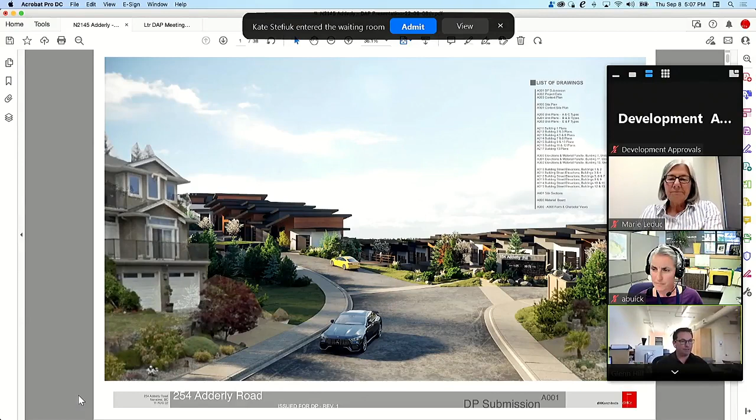As Christine mentioned, it's a 71 unit development at 254 Adderly Road. Everybody can see my screen, I take it? Yes, good. Okay, so just as an introduction, the image you see here is the gateway into the development at the end of Montclair.

Some of the project data, which you probably already know: we've got 71 units permitted. The proposed FAR is 0.45 within the R10 zone. This permits the 71 units based on 16 units per hectare. The permitted lot coverage is 40%. Our development proposes a lot coverage of 18.8% over the entire site.

I've just added one little note here: we took a takeoff of the area of the site that we could actually develop on. That excluded the 20-meter tree protection buffer along the parkway, which reduces the site area down to just over 23,000 square meters. That gives us a potential lot coverage of 36.39%. So even by eliminating all of the preserve and extra setbacks, we are still meeting our target of below 40% on lot coverage, just as a sidebar.

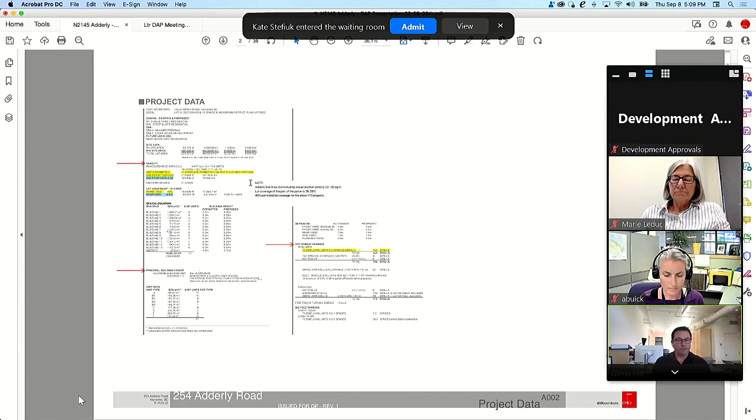We have a parking count of 174 stalls. That's based on some design criteria which we'll be able to better illustrate to you when we get into the site plan drawings. We have not requested any variances for height or property line setbacks.

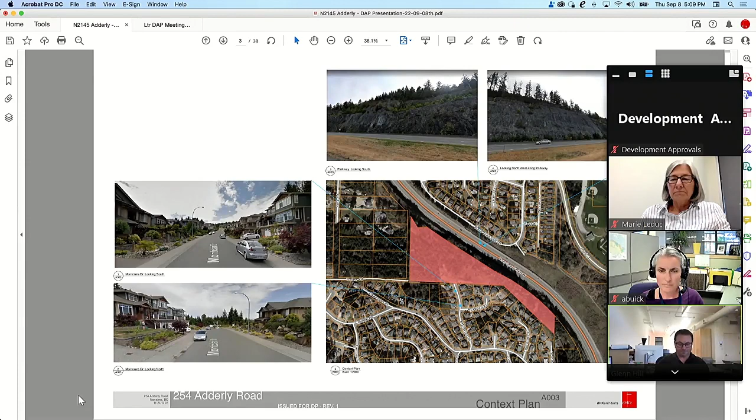Another little bit of context: this is the College Heights neighborhood, sort of the roads that flank off of Jingle Pot on the north. We've got the baseball diamonds, and just over to the east and south is Vancouver Island University and all of the associated sports fields, et cetera. This illustrates the zone within which we have condensed and isolated the development to the R10 zone.

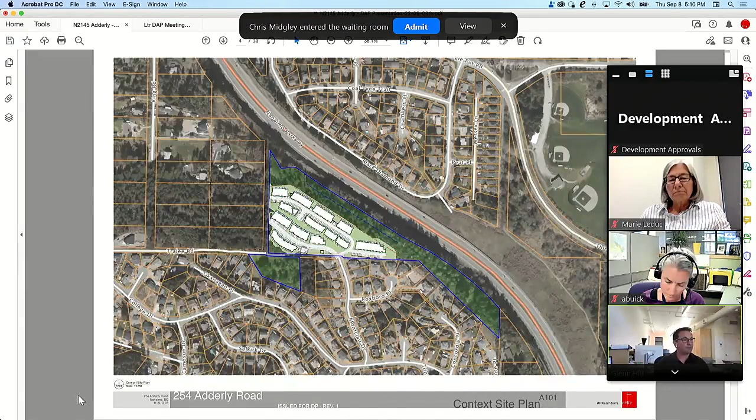This is a snapshot of what we're proposing. As Christine said, we've got a cluster of 13 buildings. The site design is oriented around a practical placement of two access driveways. Drew can talk a little bit more when it's his turn to chime in on essentially how the road was located in as practical a location as possible based on the existing grades, to minimize site disturbance.

The driveways along the uphill slopes are designed to bring the grade of the buildings on the uphill side up from the driveway a little bit, to create a bit of separation. These driveways are all potentially capable of receiving an additional parking space.

One of the big concerns we had was making sure that parking was going to be contained on site and not outflow onto Montclair and cause any additional congestion. Part of the rationale for our parking is to provide good proximity to two parking stalls for every unit, no matter where it is on the property, taking advantage of some of the longer driveways generated through the grading exercise. Those are additional spaces where parking could occur if there are additional family members with vehicles, or a bunch of visitors coming.

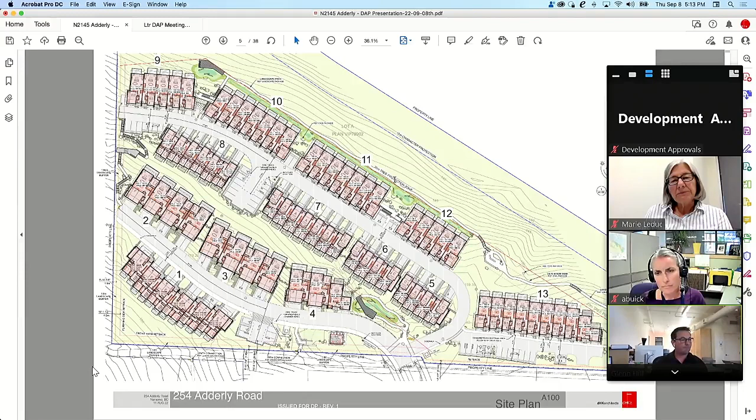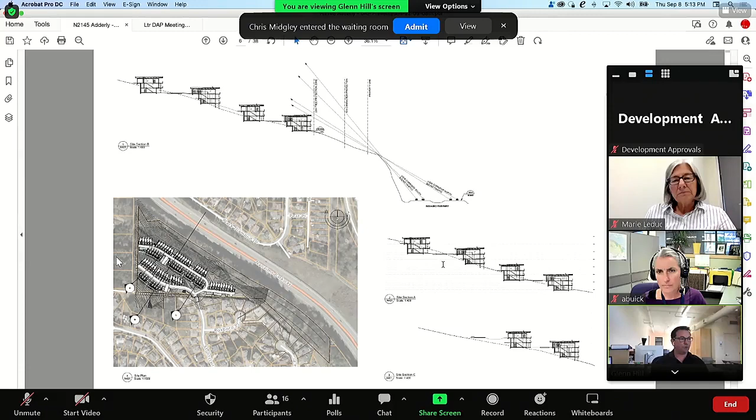These are some site sections to give you an understanding of how the units were designed to maintain nice views across roof lines—views to the north and to the east across the town.

A quick overview of our unit types: we've got an uphill slope unit type, uphill and downhill types, and then the larger units. I know you've seen these plans—we can refer back to them as part of the question and answers.

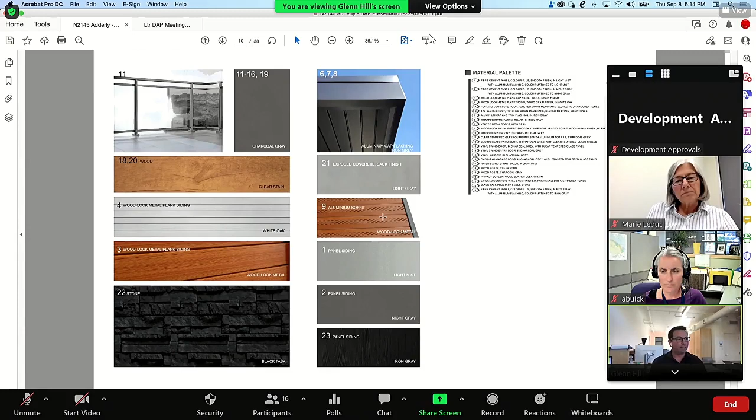Our materiality was largely driven by inspiration from the site—the forested nature of the site, the granite outcrops—and keeping within the design guidelines of working with muted tones and materials that reference back to the nature of the site. So we have a combination of muted gray tones for our flashings, wood-look metal which is highly durable, and then darker wood cladding and lighter gray cladding—a fairly soft palette of tones that reflect well with each other.

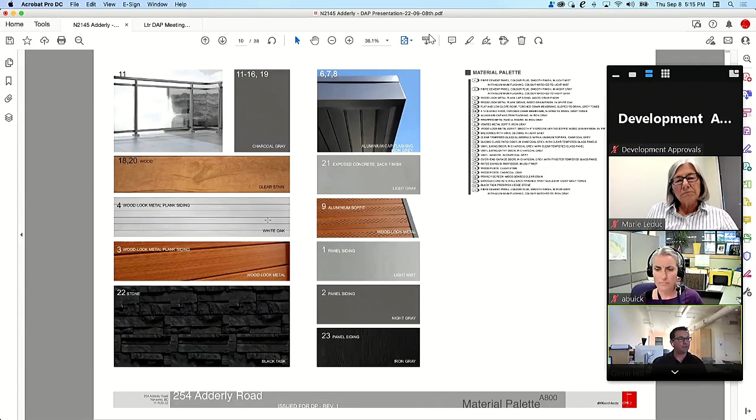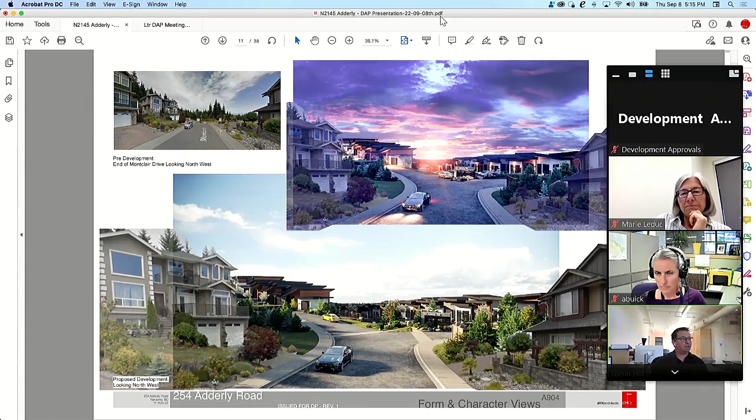Our building elevations illustrate how we have arrayed the tones of the woodland colors and the muted grays, and we've got balconies across the front. These balconies stretch out over the garage doors, hopefully detracting from them as a primary element, with the deck space and wood soffits underneath acting as our primary architectural elements.

The sloped roofs are a major part of our architectural design. We feel it works well with the stepping nature of the site—it gave us an opportunity to step and play with the undulating roof lines to create variation across all of the buildings.

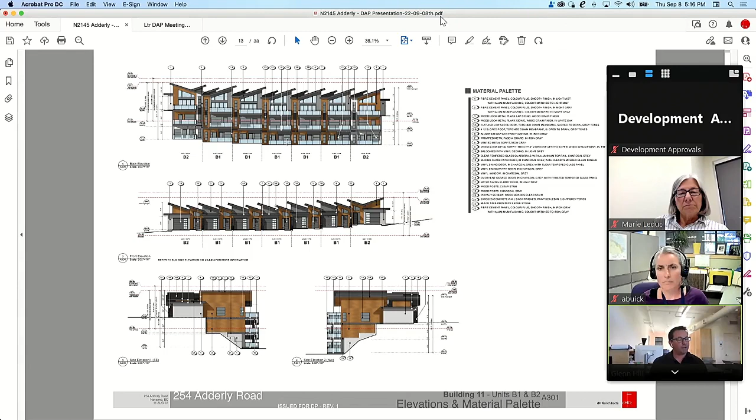Just some more illustrations of how the buildings are similar in character and adjust slightly based on the topography they're placed in. We have entry level units here, which cascade down the hill, and on the back side, this is the three-story nature of that same unit.

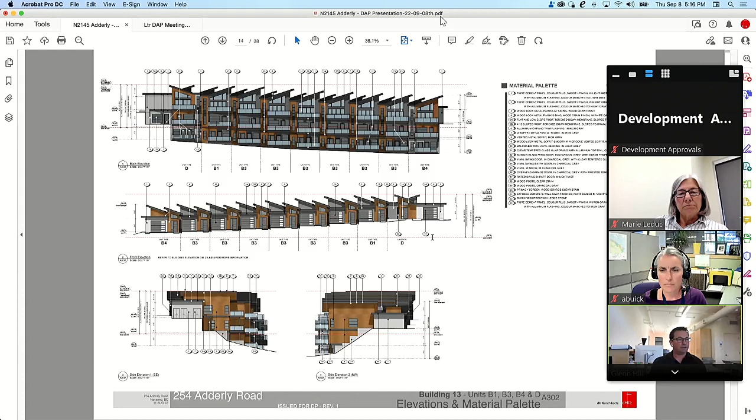Again, with building 13, it's a little bit of a unique one—it has a unique unit at the end and its own driveway. The rest of these elevations quickly illustrate that we've worked really hard to make sure we get the building design within the permitted building heights.

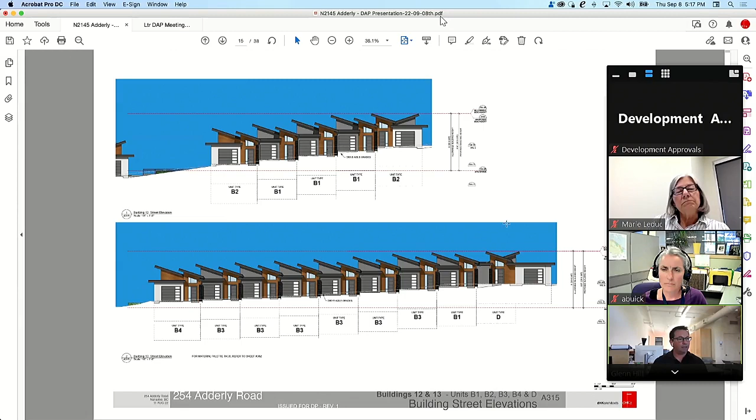You can see here the red line illustrating the maximum height, and then as we step and terrace, we actually peel away from that maximum height line. Each building had its own independent study done so that we could confirm we were working within the height while still maintaining the interesting form and character of the buildings.

Again, this is illustrating a similar concept, and then more of the buildings. There's a lot of buildings and a lot of elevations, so I'll go through quickly, and then if you have questions, we can answer them.

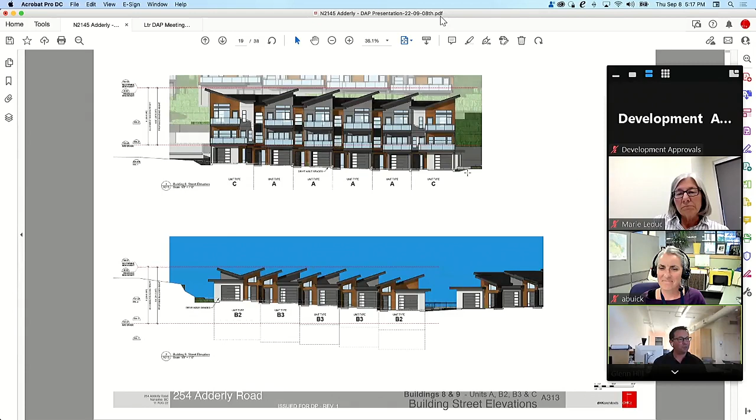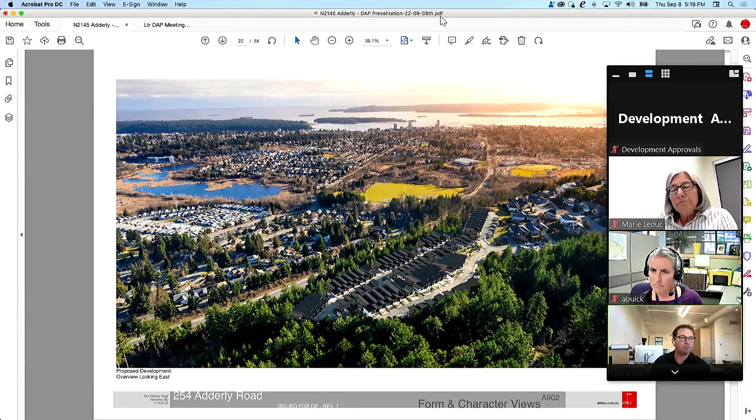This gives you an idea of the kind of overview of the city that is possible from the development.

Another illustration of the parkway and how, with the tree protection and character protection zone, the development nestles quite nicely in behind that natural buffer from the parkway, which was expected as part of the design guidelines within the parkway.

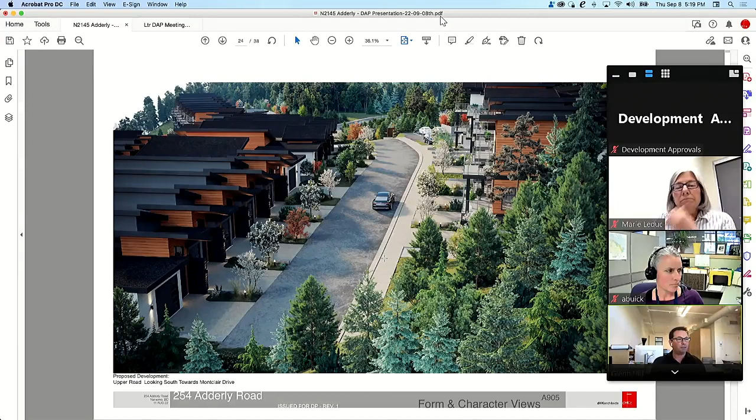Focusing in a little closer, part of our plan was to have a clean open street with planting separating people's driveways and entries, and some areas at grade level to sit and hang out, say hi to your neighbor, and then an extensive replanting of trees post construction, which Chris can talk more about. We wanted to give you the form and character of the street and neighborhood that we want to try and create.

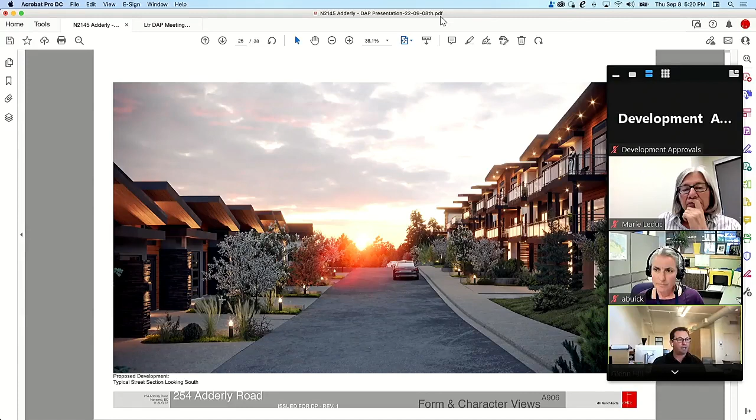You can see garages tucked away underneath these decks and open space amenities for the units, and then some patio grade level entry landscape and areas to sit and engage with the street.

This illustration is basically the majority of our buildings' form and character resting within this palette of materials, where wood tones are mixed with muted gray panel, and then we switch gears a little bit with our materiality so we break away from the monotony of multiple buildings with exactly the same material.

This is a shot of the lower road at the turnaround. This incorporates a little extra visitor parking notched into the hill. It's also where the fire truck turnaround has been designed so that vehicles can come down and appropriately turn around and leave. We're also anticipating a private garbage pickup.

All of our units have been designed with space within the garage for secure bicycle storage. The garages will all have EV charging capacity, and there will be space for long-term and secure storage for bicycles within each of the garages.

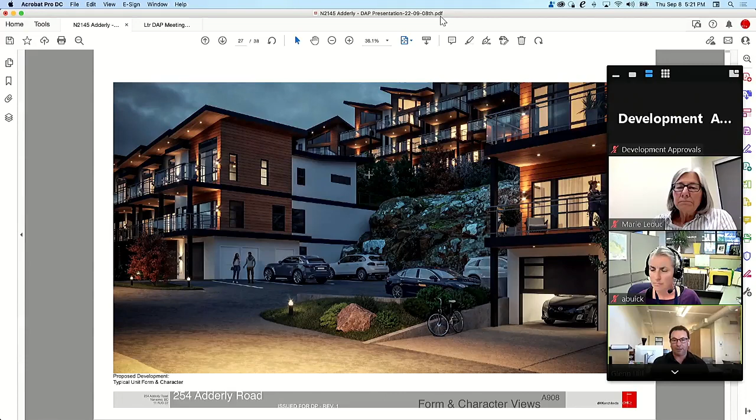You'll notice in the site plan we do have a garbage enclosure noted. We wanted to acknowledge a form and character for the garbage enclosure since we haven't confirmed the garbage service, with the hope that we could eliminate that with confirmation of a private pickup and driveway service, in which case we could convert that area into more amenity within the site.

So I will let Chris continue on with supporting landscape design. Chris?

Thanks, Glenn. Thank you, appreciate it. Hello everyone, thank you and good evening, and thank you for the opportunity to present this project.

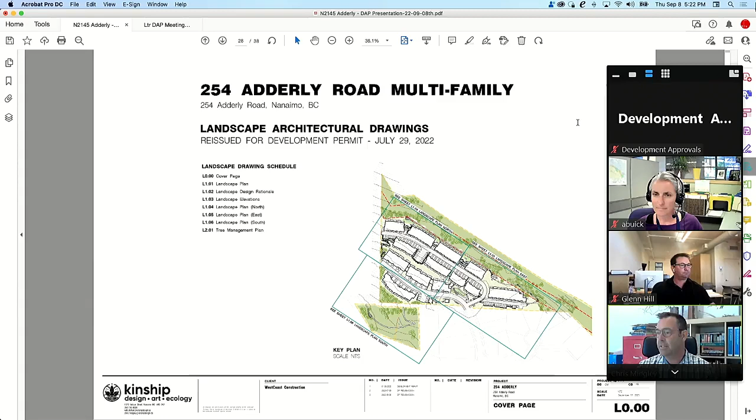My name is Chris Midgley. I work with Kate Stefuk at Kinship Design Art Ecology. I'm going to have to ask Glenn to be my navigator, if that's okay, Glenn. And so as this is the cover page, feel free to just advance to the next slide to show the landscape plan, I believe, I hope. There we go, thank you.

Okay, so just looking, I'll give a brief description of our approach to the landscape here, and then wander through the site at some of the key elements and features, and then touch on some of the more important or relevant points with respect to the development permit approval process and that sort of thing.

In terms of an inspiration or a rationale for the landscape, our approach was to take a very restorative approach and try to rebuild a reference ecosystem that reflects the Coastal Douglas fir ecosystem once development has largely been put into place on site.

So we're drawing inspiration from the dramatic natural landscape that you can see here, adjacent to the cliffside, and the edge condition that creates overlooking the city of Nanaimo.

While the site has already been largely cleared of standing trees and overtaken by invasive species in the understory, as a result of treating the site as a yard waste site for a number of years, there is evidence of an underlying historic plant community, with significant components of arbutus, big leaf maple, and Douglas fir, within a larger forest dominated by Douglas fir. This existing community reflects a sort of archetypal hillside rain shadow ecosystem that guides us as we go forward with the planting design.

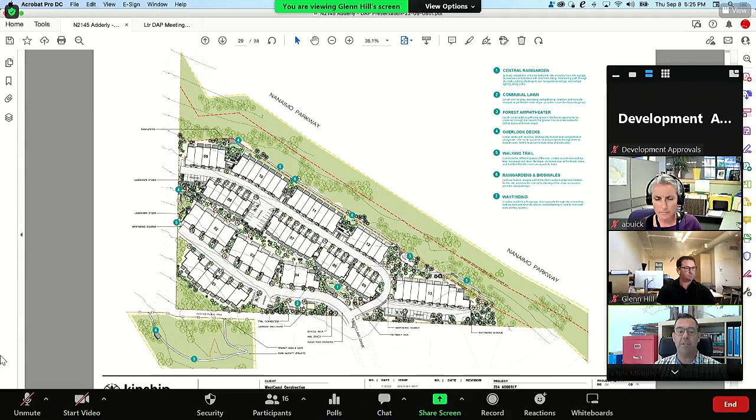Some of the key features of the landscape design that amplify the convergence of topography, natural ecosystems, and urban development include overlook decks situated strategically near green infrastructure elements, walking trails, and gathering spaces throughout the forest that create a feeling of immersion within the forest that remains, as well as communal areas and private spaces for people to play, picnic, walk their dog, what have you.

Glenn, on that page, looking at the site plan, as you enter in at the bottom of the page, sort of south, your first point of orientation would be this central rain garden and overlook deck, represented by number 1. We also envision wayfinding signage welcoming you to the neighborhood and directing you within that development.

There's a communal lawn space capitalizing on what is pretty much the only flat portion of the parcel, which is where number 2 is located, at the south as well. There's a garbage enclosure that I understand is not necessarily going to be there any further, which allows for a potential increase in area of that communal space, creating additional gathering areas for the community. Between the locations of 1 and 2, the central wetland rain garden and the communal area, we try to create that as a center within the arrival point of this development.

As you meander down to the lower road, near between buildings 12 and 13, we've incorporated a sort of forest amphitheater. This is the secluded, quiet, contemplative space where people can feel really immersed within a forest ecosystem, despite being proximate to significant urban development.

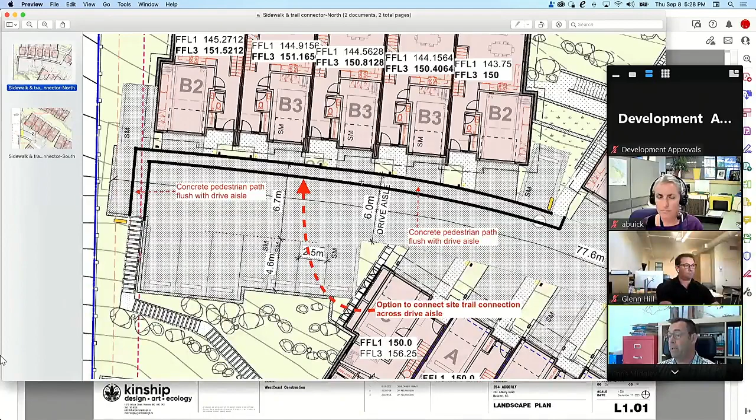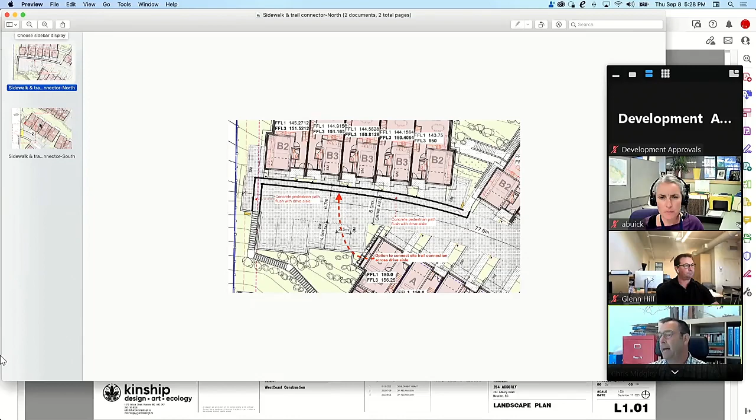Glenn's brought up a couple of images showing where those connections could potentially be situated, currently at a relatively conceptual level, but that's much clearer in front of building 8 or 9, creating a much more direct connection to make that a more continuous path.

The other thing worth calling attention to is we've done the best we can within the constraints of the site in respecting the Nanaimo Parkway guidelines and the 35 meters of forested landscape between the parcel boundary and any development. As you can see, Nanaimo Parkway is written, there's a yellow line indicating the parcel boundary. The first dashed line is the character protection zone, and then beyond that, a further 25 meters, totaling 35 meters.

That is a tree protection zone. So the only intervention you see there is a path, and that path would be field fit. The location is conceptual at this stage, but the intent is to fit that between trees, not down trees, in order to accommodate that path.

If you go to the next image, Glenn, thank you. Rather than delving into the rationale and precedents, just reflecting on the plant palette, if you scrutinize that you'll see the species we're proposing are truly reflective of the Douglas fir, salal and arbutus, Doug fir shore pine site series ecosystems of the coastal Douglas fir biogeoclimatic zone. There are complementary ornamental species where native species would not thrive, as per common practice, but fundamentally it's a landscape deeply inspired by the local ecosystem.

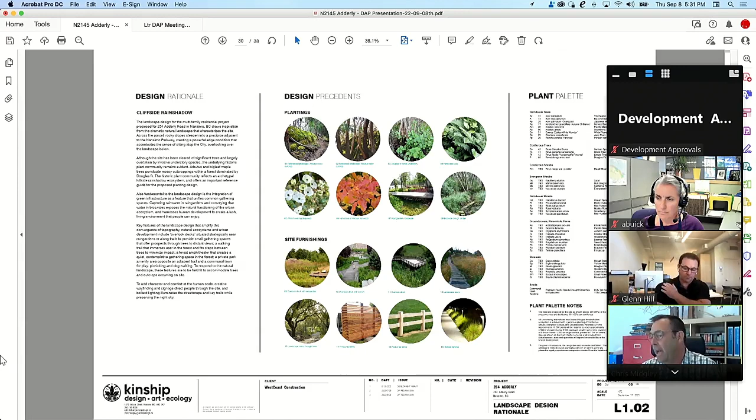What I really want to focus on here, there's a couple of sections showing cross sections through the rain garden and the forest amphitheater. Not to dwell on those, other than to say the character we're trying to evoke is that real sense of immersion within a lush, thriving ecosystem, inspired by water or the local forest. While this is conceptual and illustrative in nature, it does convey the intended character, which is to create a real juxtaposition from the developed to the natural.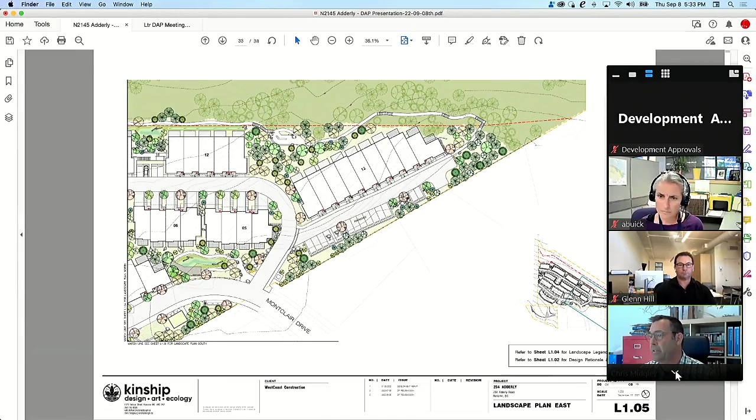Finally, there's been discussion regarding the parking and ensuring that any excess parking, particularly at street level, incorporates permeable paving options to ensure rainwater does get infiltrated and return to the natural systems. Here's an illustrative concept provided by Glenn, showing some of the areas where we would envision that permeable parking. I think that probably covers the landscape adequately.

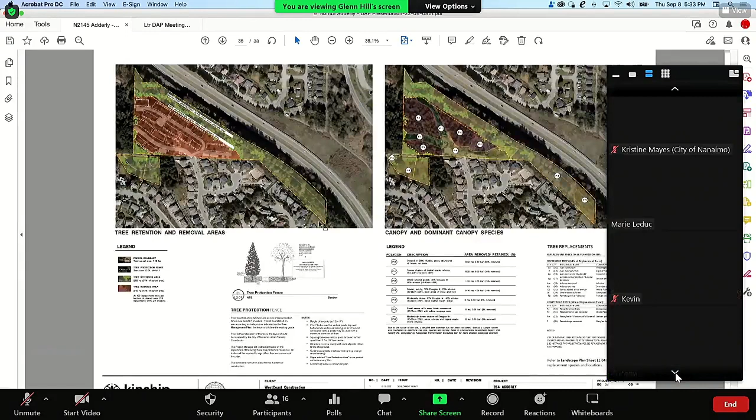Thanks, Chris. I'll jump in here now as well. I'm Drew Beiderwieden, I'm with Newcastle Engineering. I'm the civil engineer for the project. I'll just speak really briefly on a couple of points.

First, just to follow up on what Glenn talked about regarding the roads. The two main internal access roads were sited, as Glenn indicated, to make the most use of the limited level area on the site and contour along, so as to provide the most access to building areas while minimizing the amount of grading needed. Hence the single T intersection, to reduce the amount of space needed for roadworks. We also kept the lanes to a minimum width, again to reduce the amount of grading required on the steep slope.

On the stormwater side, Chris touched on some of the surface features we'll be using. This site is tributary to the Millstone River, and as such it triggers the city's requirements for both retention and detention on the site to mitigate post-development flows and keep those at pre-development levels. And also, as always, there's the stormwater quality requirements for any waters discharging.

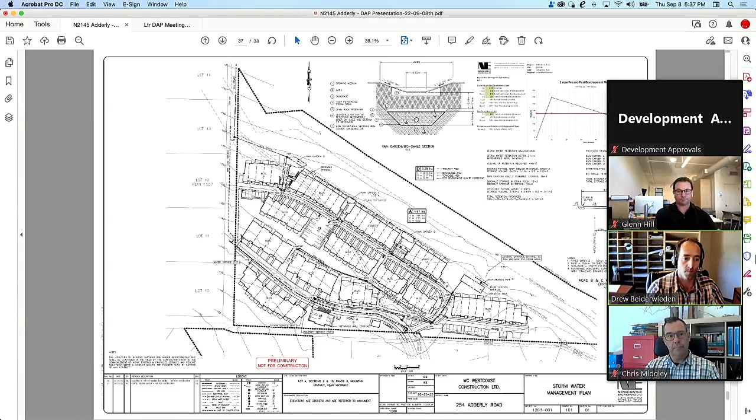Thank you, everyone. That hopefully wraps up our presentation, and we're happy to hear some comments and questions, and happy to answer anything that we can.

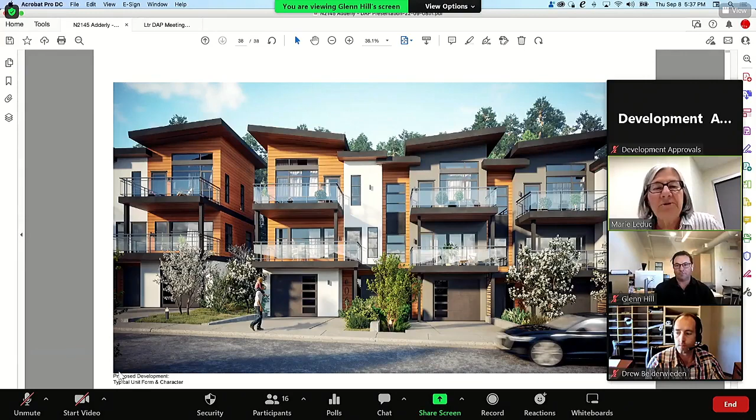Great, thanks, Glenn and team. That's a nice, thorough presentation. If you can stop sharing your screen, and then I can see everybody here. Let's see what we have. Okay.

Now, first of all, does any of the committee members have questions for staff? I think, Angela, you had one, so if you want to go ahead now.

Yes, through the chair to staff. I just was curious, with this zoning and regulations around it, would it permit bed and breakfasts to occur in these units? Let me just check the zoning bylaw. So like short-term vacation rentals? Or yeah, that, or however the city deals with short-term vacation rentals or bed and breakfast. Yes, so under the R10 zone, short-term vacation rentals are permitted. Okay. That's all I had.

Kevin, you've got a question? Yes, thanks, Madam Chair. Kristine, you hinted at the applicant possibly having a need for some variances, and the applicant said they did not have any variances. Can you shine any light on that?

Yes, so there has been, I would say, a partial redesign. So there were initially some variances, and potentially over time -- I think Glenn could probably speak more to what they've done. It was height and some setback variances as well, and those have been reduced. So we have had some conversations with a reduction of variances for the setbacks, and the applicant has gone ahead and redesigned as well on their end.

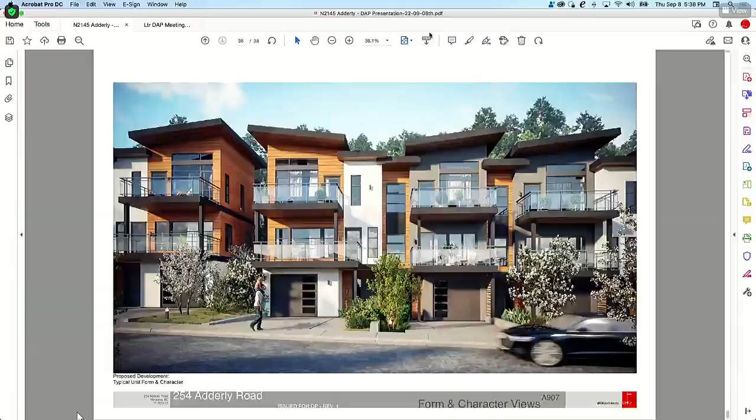Okay, maybe I can share my screen, and that way everybody can see. Can everybody see my screen? We can see it, thank you. Okay, great, perfect. Good afternoon, everyone.

I'm Igor Nardin with DCA Architecture, and I am an architect at the AIBC. Donna's left me about a minute and a half, I think, so I'll speak quickly. We're here to present a mixed-use building at 1586 Boundary Crescent.

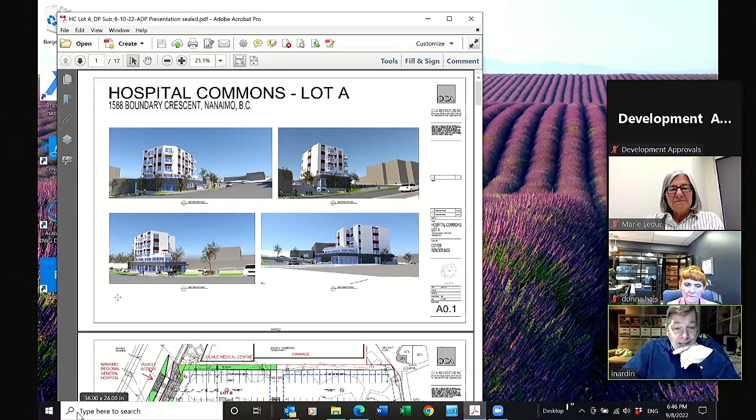The proposed building will house the relocated current restaurant, which has serviced the community for many years, as well as 12 residential units above. The site, as you can see, I've added some markups just in case you're not familiar with the area, but just in case you're not.

You make the, excuse me Igor, could you make the image full screen? Sure, thanks, that way I don't have to look at myself. Oh, I still can see myself. Oh yeah, well, you'll be in the little.

Okay, no worries. The site, as Donna mentioned, will be subdivided into two lots: a lot B, which is an L-shaped lot, and a lot A, which is the corner lot, the location of the proposal in front of you.

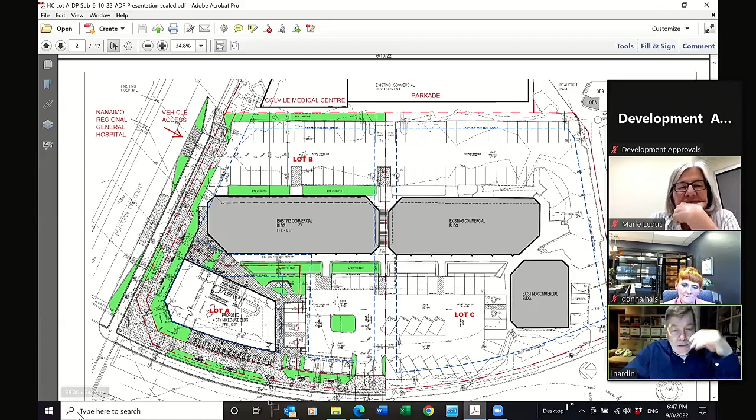Obviously, the corner of lot A has two streets, Dufferin Crescent and down below Boundary Crescent. Across the street from Dufferin you have the Nanaimo Regional General Hospital. To the west of lot A you have Millstone Medical Center, built maybe 6-7 years ago. To the east of lot B you have the Colvile Medical Center and the Parkade.

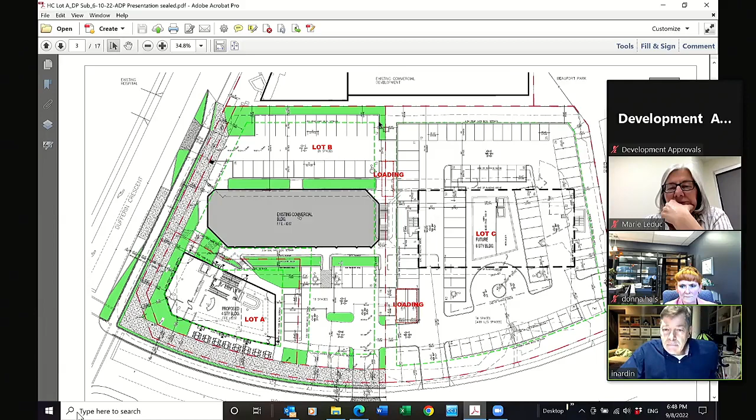This particular lot, we've just designated these as letters for now, but this is lot C. What I'd like to show you before we go too much further is what we have proposed. This is just a study done with respect to what may happen on lot C. As Donna mentioned, this was just a study in parking, so it's not going to be a massive asphalt thing, but it gives you an idea of how we can accommodate the parking. There'd be two levels of parking, a surface level and an underground level. Essentially this is the shape of what we think the building may look like above. Okay, so it gives you an idea of what we have.

With respect to lot A, because we're at the corner, lot B will eventually be the lot that has the two access points, one off Dufferin, one off Boundary. This lot is virtually impossible to have an access on it, let alone underground parking at this point. So the way we designed it, we would retain the two existing access points that exist there now. When Lot C is developed, there would be another access put in, one off the laneway and one here. This whole site would operate as one site with respect to parking and also loading.

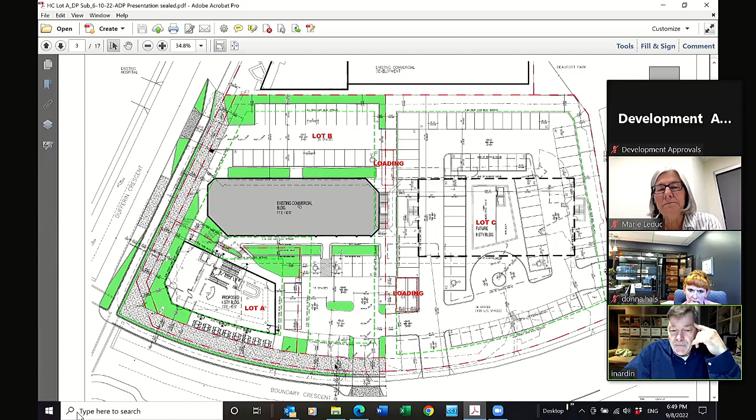So what we provided, as Donna mentioned, the site slopes down to the east. So basically this upper level faces Boundary. The lower level actually faces the parking lot out back. That's why Donna's saying all the existing buildings on the site are these two existing buildings. They're all 2-story. Okay, so basically access to the underground parking garage at that point will all take place off of Dufferin Crescent. And as we've shown, more or less where we think we have room to provide the loading spaces.

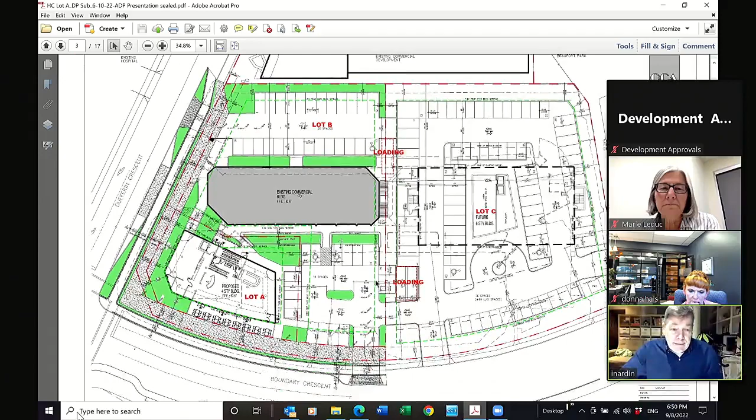So just jump quickly to the actual site. As I mentioned, it'll be right on the corner. There was quite a bit of land expropriated for this at this corner. The red line that you see here is actually our property line. This is where it was previously. The expropriation will house wider sidewalks, bike lanes. We've discussed with the city about adding in green spaces within that space. There's a bus stop in this area.

There's also more landscaping within the site. These areas already exist as part of Building B, but what we've done is add in more gathering spaces within the site. As you can see, there's virtually no parking on this lot per se. However, as I explained previously, as we develop Building C, that parking will come, so to speak. The other aspect is when you look at the stats, by adding the hotel, the parking load actually goes down, surprisingly, mainly because the medical buildings have a very high parking load. The other thing Donna mentioned is the actual medical use of this building does not have as many visitors as you would normally get in a medical building. However, it's more of an office building as opposed to a medical building. But I digress a little bit.

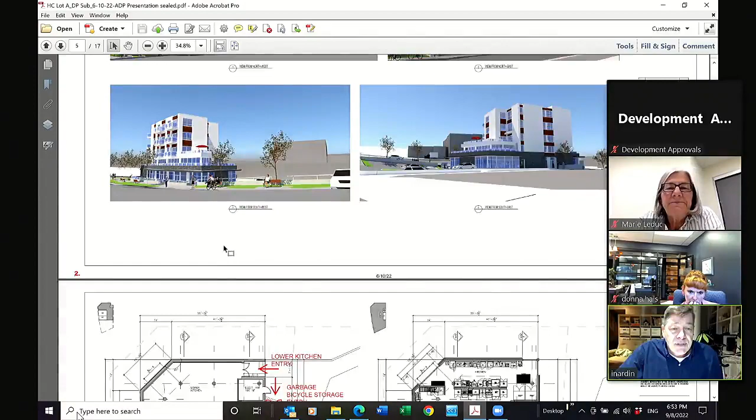The key thing I wanted to do, maybe I should go back to this one, is just explain some of the key entry points to this actual building. The southwest corner will be the actual entrance to the restaurant space, and adjacent to that we have an outdoor patio that faces west. The residential upper floors will be accessed at this point within the site. There's an elevator here, stairwells, and so on, so they have their own little vestibule.

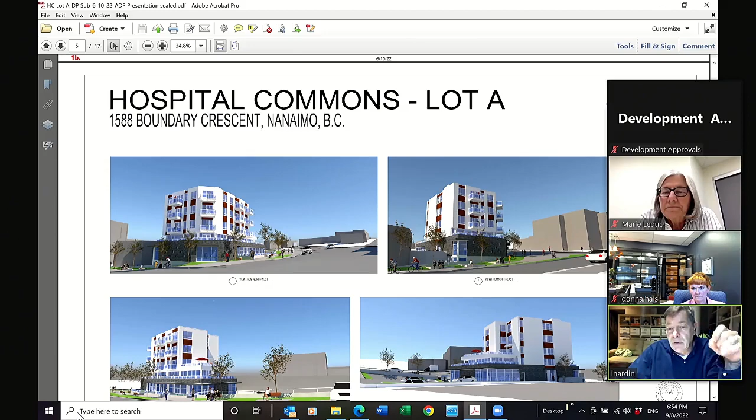There's a lower area here which gives access into the basement - I'll show you on the rendering, it's a little harder to see here, but it actually happens right here. That will give the restaurant access for deliveries and so on, but it'll also give access to the basement level, which houses a prep kitchen that will do everything from baking goods to just preparing things for the restaurant on the upper floor.

This elevator will be used, and there will probably be a dumbwaiter used in there as well. The lower level will have the staff change rooms and washrooms for the restaurant staff. There's also a residential storage area and a large bike room.

Generally, with respect to cycling, we've provided enough spaces for at least one bike per resident. This would be the lower kitchen entry, and there's a whole garbage area we've provided here that is hidden from the street. What I'm going to suggest, since it came up in the comments, is that we provide a bit of a garbage room and access into the lower level for the bikes. From there, they can go up the elevator to their suites.

The ground floor, which is the ground related level, again has the restaurant with the southwest entry and a nice large patio, ground level located. We decided to put it on the west end, though there's enough sidewalk room to put it on the south end as well, and quite a bit of space on the east side. So we're really trying to animate this space as much as possible. It also faces south, so it gets most of the sun - that's why we felt if we were going to put seating on the ground level, it was best to put it in this area.

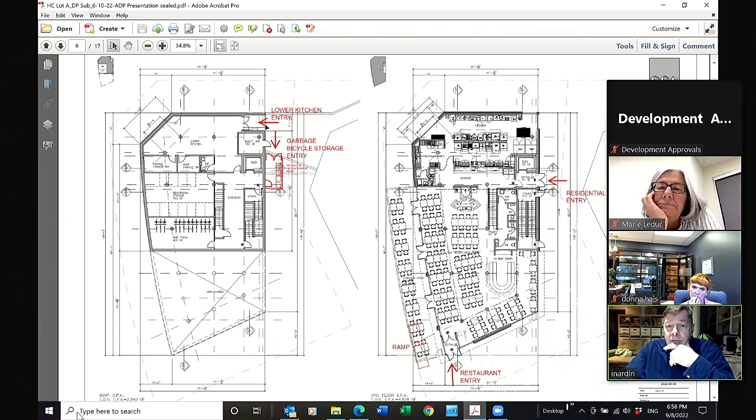As I mentioned, the residential entry is on this side, and the lower level is accessed from there. The mezzanine level will again have more seating, washrooms, and access to the elevators for everyone. There's an internal stair that takes you down into the space - this would be the double height space. We also have a terrace that surrounds the building on 3 sides.

Again, taking advantage of all types of scenarios - some people like sun. I'm a shade person, so I'd be sitting out here someplace enjoying the intersection and what's happening across the street.

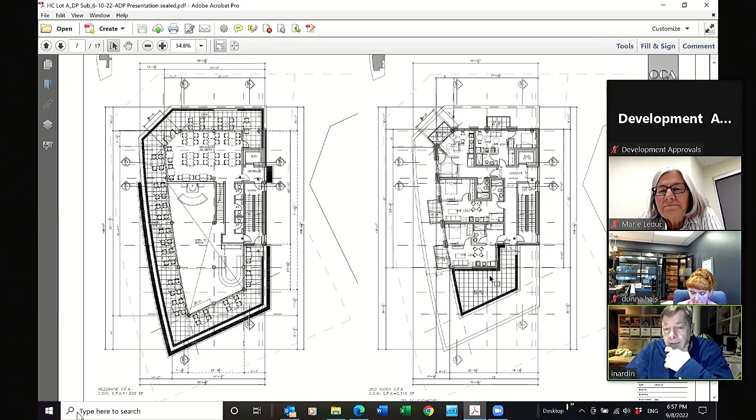The second floor would house 4 residential units plus an outdoor terrace. We thought that because we're going up 3 stories, this gives them a nice little refuge away from everyone, and there's enough separation there that they can really enjoy the space.

The 3rd and 4th story would again have 4 units per floor. Each unit would be 1-bedroom with 1 bath, and each one has a balcony of about 50 square feet, give or take.

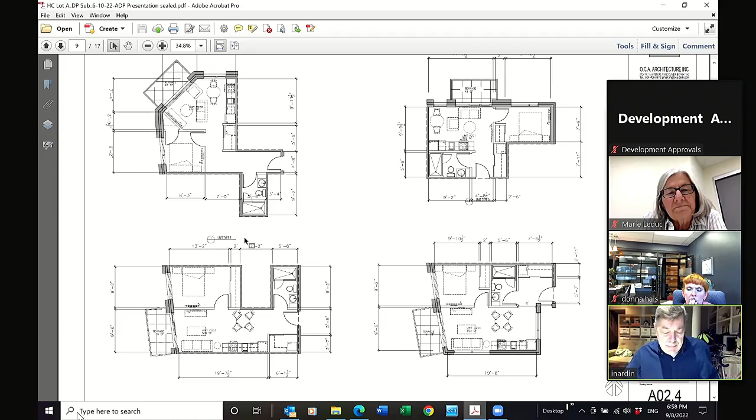With respect to form and character, what we are trying to achieve here is create 3 distinctive parts to the building. In many ways, it actually conveys what's happening within the building, but it also adds to

the streetscape in such a way where you can easily read the building. We'd like to start with a solid, heavy base, which houses the ground floor restaurant, very transparent, and it responds to all the corners in many ways. It also provides an area where you don't have people looking out at you. So it provides a variety, and I think that's what we're trying to convey here.

There's also the patio that faces west, which animates the street. I haven't thrown in many, you can see I've thrown in a few umbrellas here on the side, but you can imagine how that would look as it becomes more and more animated.

The second, or the mezzanine level, is this area here. What this actually is, is stepped back from the building, and stepped back from the upper floor. So what you'll get at night is this lit kind of slit, and then this building sitting on top of another building, so to speak. So we're trying to lighten up the building.

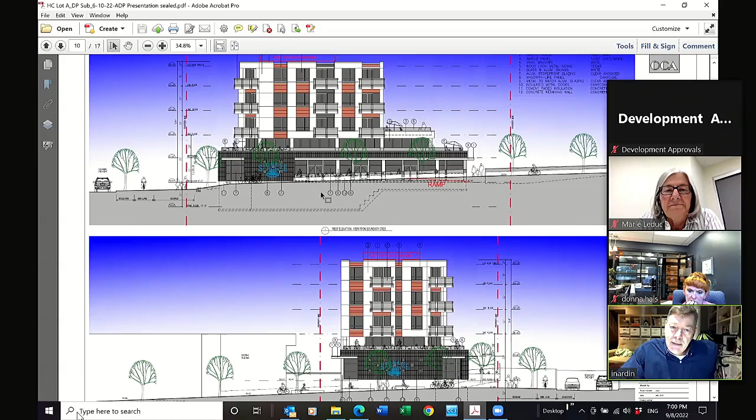I think this is what we were trying to do here, that it becomes the corner, so to speak, at night. During the day, sure, there's a lot of people coming and going. This site is so easily accessible that even when you look at the Windward Pub, you'll find that a majority of the people that visit that restaurant are walking over from one of the other buildings. Past 5 o'clock, where the offices shut down, you probably get more people driving to the site. So this is a very urban kind of approach, we think, for this building, where parking becomes almost secondary.

So this is basically the elevation facing west. This is the elevation facing north. This would be the elevation facing east, which again, this is the gathering area that I mentioned between buildings, the access to the residential area, and this is the recessed area off of Dufferin Crescent.

I should have mentioned it looks very recessed at this point, but when you get down towards the east end where the driveway is accessing into building B, it's actually at level. So this retaining wall that you see here actually starts at about 8 feet and then goes down to 0 at one point. And this is the south facing elevation, as you can see.

I think Drew will speak to this a little more, but because of the expropriation and the slope that we need for the driving, the sidewalks, the bike lanes, and so on, it's actually raised the grade with respect to this site. So what we actually have is a slightly recessed patio on the side.

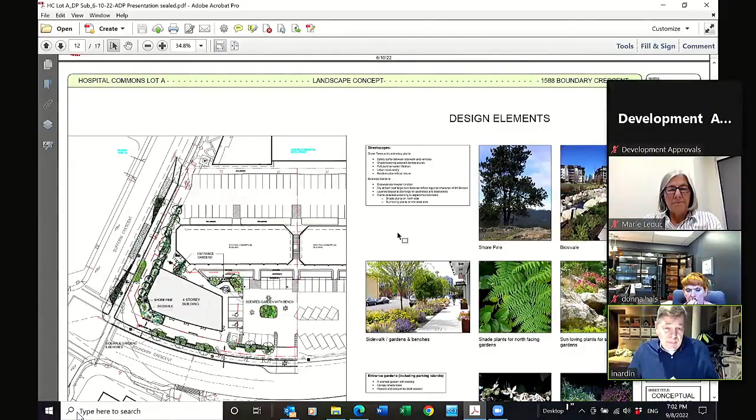Having said that, the retaining wall makes for the retaining wall being actually quite low, and you'll see what Victoria has proposed in terms of landscaping. That retaining wall actually won't be visible at all. Apart from that, maybe I'll just comment quickly on the materials.

What we envisioned for the lower plinth, heavy plinth, would be a masonry or masonry-looking material. For those of you familiar with Colville, there are some products out there that mimic masonry that are really quite attractive, and there's no efflorescence, there's no maintenance, there's nothing. They're pretty phenomenal. Whether we go to one or the other, it remains to be seen at this point.

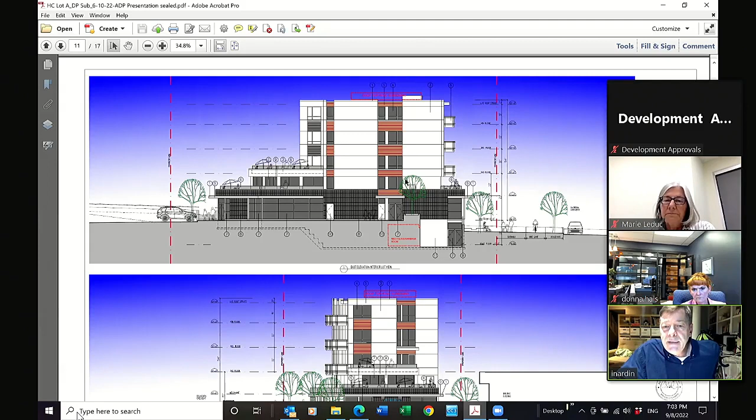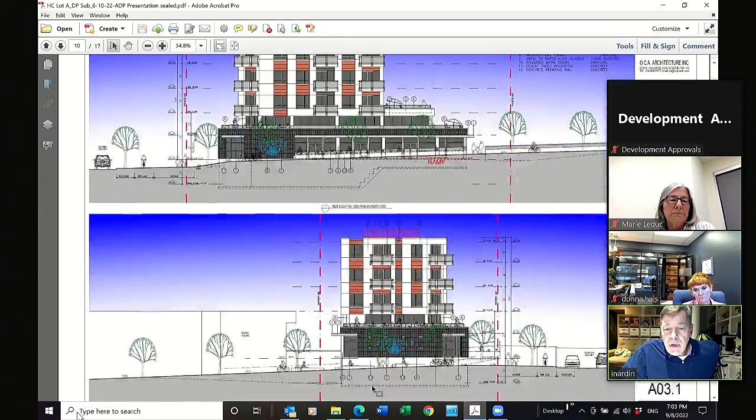What we've proposed up above for the residential units is Hardie panel, and that Hardie panel, or those upper units, will be divided using a wood look metal siding. The idea in many ways was to try to break down the scale of this building as well. It's not a big building. However, the ground floor does have quite a bit of length along boundary, not so much along Dufferin Crescent. However, we just felt that animating this made it more suitable to this area and maintained the pedestrian scale that we wanted for this property.

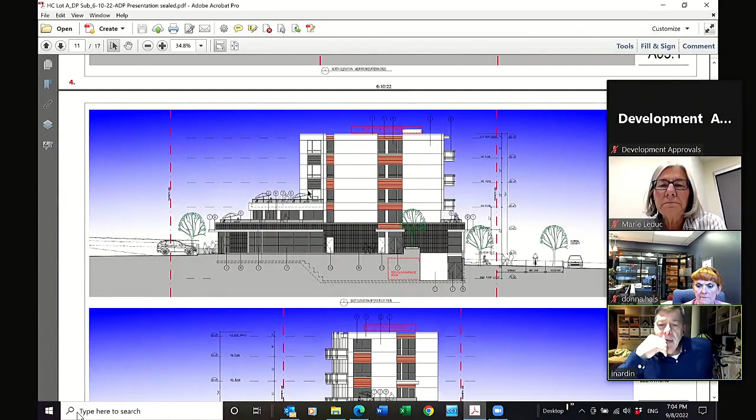I think I've pretty well spoken about everything I wanted to have your eye look at. At this point, I think we should take a bit of a look at the landscaping scheme, because this project really does incorporate the landscaping into the building.

I don't know if Victoria is available. Is she here today? I'm here. Oh, are you? Okay, great. Victoria, if you'd like to take over. Yeah, sure.

So the first page that's up just shows some of the sort of inspiration and palette. But as both Donna and Igor eloquently stated, it's really about the street and about urban landscapes. And if you're dealing with that kind of landscape, it's obviously a different thing than when you have a lot more room. So what we tried to do is use the street and incorporate a lot of urban features.

Features like seating, like just places where people can interact, and people can interact with people in the restaurant. They can interact with people walking around the street. So that's basically essentially what the landscape is about.

So they're small spaces, but very densely planted, so that there's enough variety, trying to get more of a sort of garden feel - and I say garden, not meaning vegetable gardening, but in the traditional sense - more gardens rather than landscapes, if you see what I mean. I think of a garden as a more intricate, more varied kind of planting than you'd see in a landscape, which is sort of monocultures.

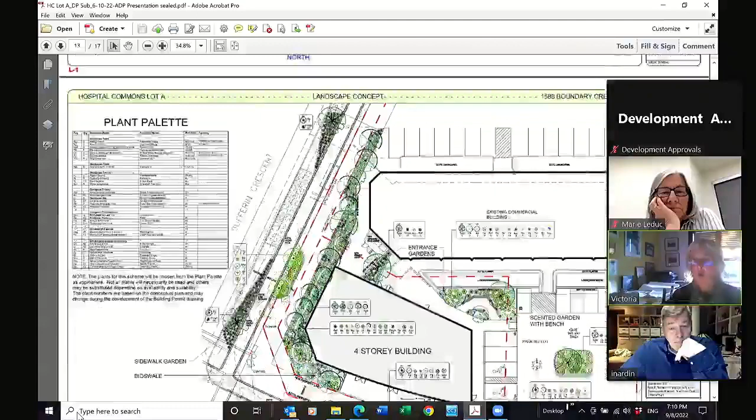If Drew can talk about the bioswale a little bit more - it starts on the corner and then wends its way along parallel to Dufferin. Oh yeah, that's a big one, there's a blow up of that, but it's the same, I think it shows the same ideas. And then where Igor was talking about the loading dock down where it's slightly depressed, we've got plants sort of softening those walls as well. Yeah, I think that's it.

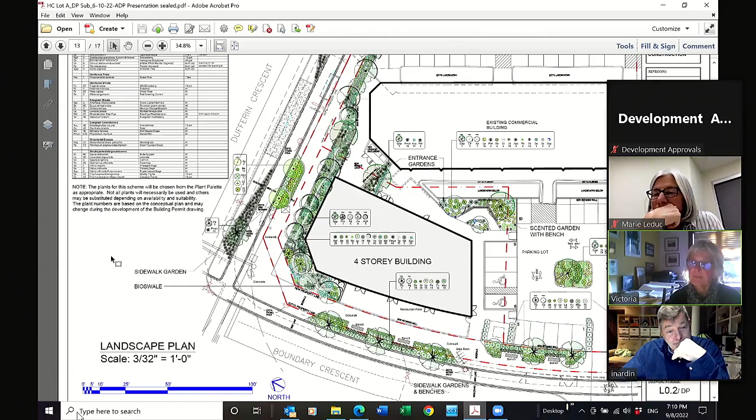Yeah, I can jump in, Victoria, a little bit. I guess just to mirror a bit of what both Victoria and Igor said, a lot of what's framing up this site is obviously the two frontage roads. And the city has moved towards the complete street design, which is set out in their manual of engineering and standards. And so that includes both a bike lane as well as a sidewalk.

And for both these roads, they actually get classified as mobility streets, which means that the required sidewalk width is fairly substantial. I believe it's 4 to 4.6 meters along both frontages, and that's simply for the sidewalk. And then there's an additional 2-meter bike lane.

So that ties into what Igor was talking about, where it sets those grades, because those are required to slope away from the curb, up towards the property line at 2%, basically carries the grade of the road right up into that property line. And in the case of Dufferin, there's actually not enough road dedication to incorporate all of that, so a portion of the sidewalk actually extends in an SRW onto the site. So that kind of frames up the site.

As Victoria said, we are proposing to the city to use some of the sidewalk area for those benches and planting areas. In regards to the stormwater management, obviously the building and the parking areas take up a large percentage of this site. We do have that bioswale along the front corner, so we have the opportunity there to have a substantial depth of soil, in which we can discharge all the roof leaders from this building into that bioswale. And with that deep depth of soil, these bioswales are able to provide both water quality management items, as well as meet the city's detention and retention requirements.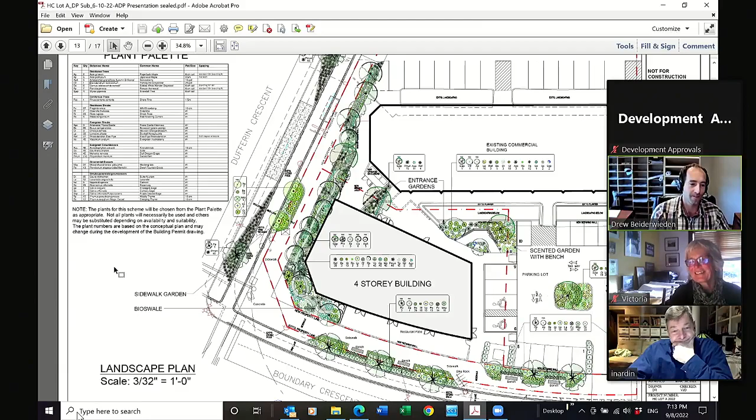Yeah, I think that's about it. I'm pretty sure nobody wants to get into the numbers that go behind that, so I will leave it there. Okay, if that's it, that's our presentation. Thank you. Great, thanks, Donna. Maybe stop sharing the screen now.

Great, okay, so does any of the panel members have any questions of staff on this project? Okay, seeing none, maybe we can start with Tony, if you'd like to give your comments.

Thank you, Madam Chair. Yeah, I think this is a very important project, a very exciting, very important component to the whole comprehensive plan for the hospital campus, and it should be extremely successful with the components that are going into it, the residential accommodation, as well as obviously the food service. I think the design is very good, very well laid out.

It's a very tricky site, not just the shape, but the grades are extremely serious, and I think the applicants have done a really good job of incorporating them, particularly that lower entrance into the service space and the bike area and lockers. Certainly encourage that proposed additional little entrance there for convenience, so all the bikes don't have to go up and down the elevator. So that's good.

The only small thing I got in terms of form and character is on the elevations all look great, but one doesn't really see a building in elevation. And when I looked at your 3D views, it seemed to me that the top of the building looked a little unfinished. It almost looked like it needs a cap or some variation in the heights of the different massing panels. It looked like it just been sort of lopped off and left. I just wonder if that couldn't get a little more attention. I don't know if anybody else feels that way, but that leapt off the page at me. That's all I have to say. Thank you.